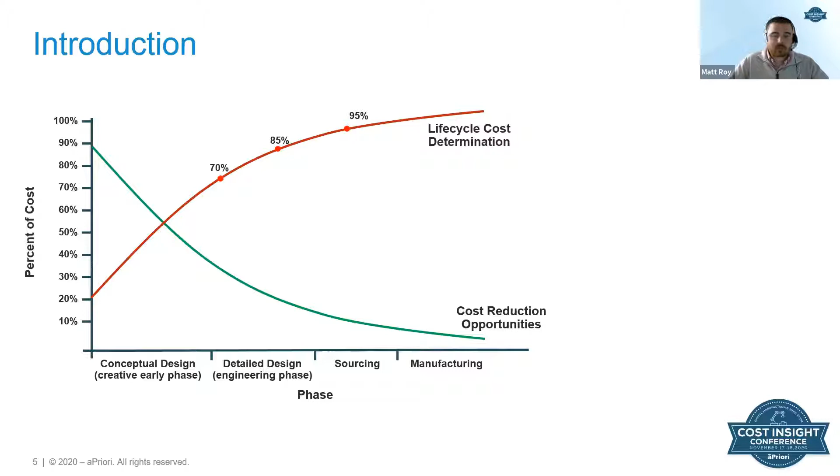So what I would ask you to do today is think critically about the concepts that we're going to be discussing and how they may be applied to your particular business processes. And hopefully by the end of the presentation, we'll be able to apply some of these techniques to identify previously unknown cost reduction opportunities. Ultimately, what we're looking to do is increase efficiency and quality while decreasing our overall cost.

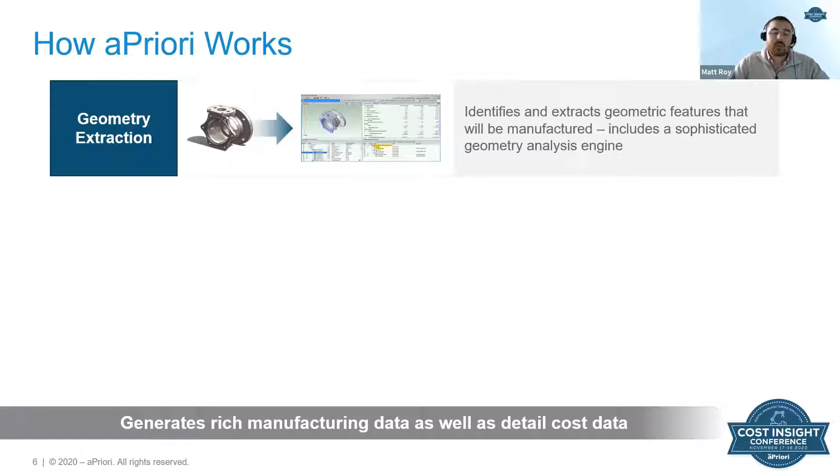How aPriori works. I want to spend a couple minutes talking through how aPriori works at a very high level. What we first do is we take our 3D geometry from a CAD file, we load it into aPriori, and from there, we're able to disambiguate individual geometric artifacts into GCDs, or geometric cost drivers. Once we have those geometric cost drivers, we run those pieces of geometry against manufacturing simulations in our cost models at the back end of our digital factories.

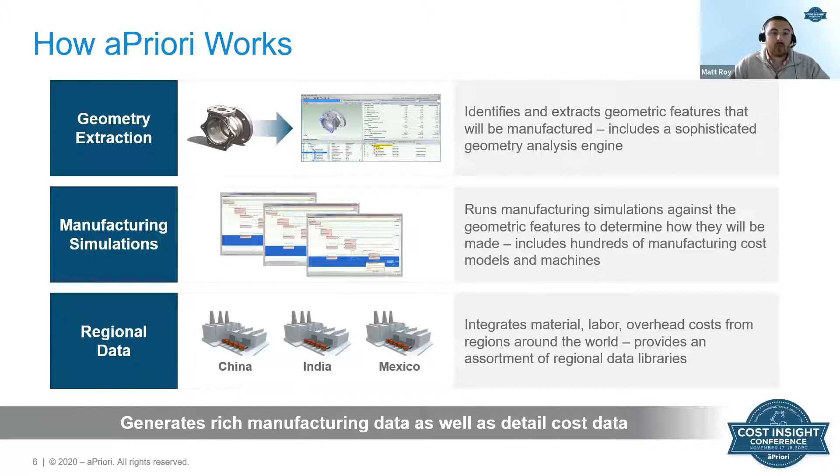And our output from that analysis is cycle time. So we get a cycle time for every single feature on the part. Then we roll that cycle time up to the process level, and from there, we impose accounting logic and data against that time to arrive at a cost. The accounting logic can be driven from the US, or from other geographical regions around the world to better represent your particular manufacturing environment.

The first topic that I want to discuss is establishing visibility into estimated cost and target cost. Everything that falls in this presentation is going to be pretty important to us, but this analysis of looking into estimated cost versus target cost is where we need to start, because it gives us an idea of which components we need to look at deeper to understand if there are potentials to reduce our cost based on what our target cost is.

So in design, and specifically VAVE, it really does help us have the visibility into what our estimated cost is compared against our target cost. This presents a pretty interesting challenge in that we're never looking at a single component. It's always multiple. We don't make a component. We make a component to put into an assembly to go into a larger overall assembly that might then make its way into a larger product like a car or an engine, something along those lines. And one component is just a single element of that.

So tracking these estimated costs and target costs can generally be pretty time consuming. But what we do have is a tool called Cost Insight Reporting that allows us to easily view the requisite data in condensed format. And for those unaware, Cost Insight Reporting is a business intelligence tool that enables our data aggregation and visualization. So through that tool, we can start to get an idea as to where our estimated cost is in relation to our target cost.

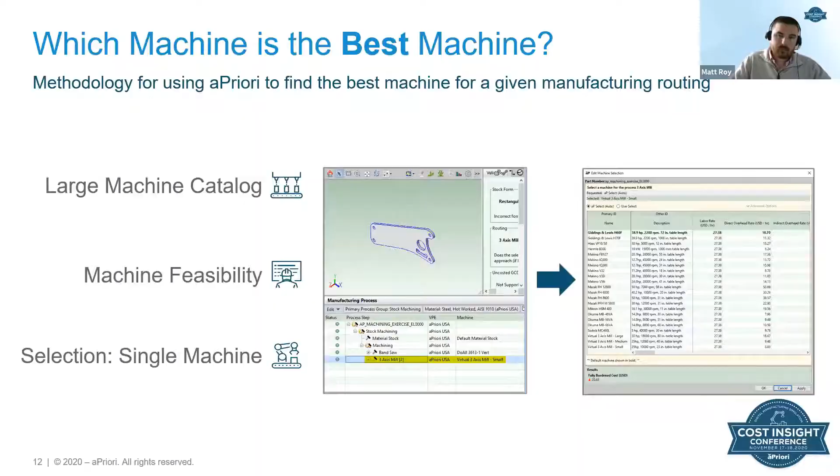And the last bit of analysis that I want to talk about before we get into our demonstration here is why bother with manufacturing alternatives? Right, you have a part, you know what the manufacturing routing is intended to be, but we want to explore a bit more. We want to understand exactly, is that the best manufacturing routing? You know, is 3-axis mill, for example, the best routing for our part?

Like I just previously mentioned, the manufacturing process chosen might not be the most cost effective. And much like the other analyses, it's time consuming to perform a costing for each different routing, compare, and do all the other legwork that's associated with it. So first of all, why bother with manufacturing alternatives? Well, dollars might be left on the table.

So this situation provides us with the opportunity to explore other potential possibilities. We don't necessarily know if we're getting the best deal or if we're using the best machine or the best routing. We can understand where that might be by evaluating other alternatives. We can also glean some manufacturability information from the process.

To keep with the 3-axis mill example, perhaps we say that a part is going to be manufactured in a 3-axis mill, but running it through aPriori deems that infeasible. Well, that just gave us a pretty good piece of feedback in that we shouldn't even bother considering 3-axis mill as a process from here moving forward.

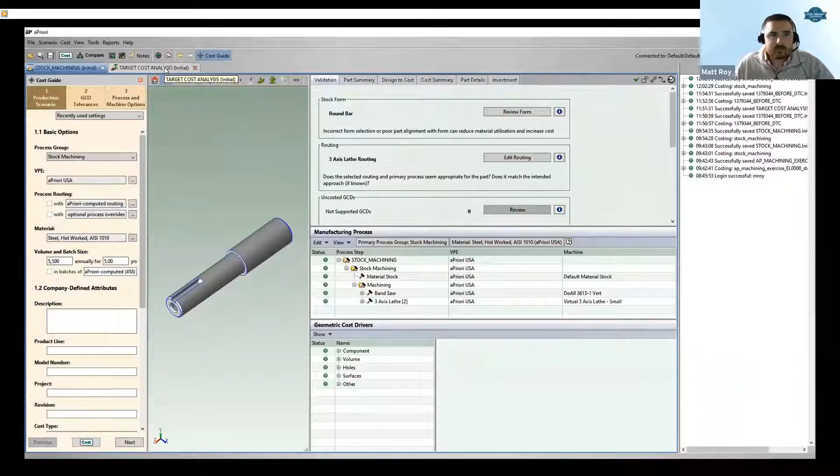You can see in the tab to the right of where my mouse currently is, and we'll get there in a moment. But if you hadn't yet created a target cost analysis rollup, you can very easily just go to File, create a new rollup, and supply whatever inputs it asks for, and then you'll have that accordingly. But if we flip over to the rollup here, I've already gone ahead and specified our target costs on all 5 of these components.

So once you have your target cost set, what you're really going to want to do is launch Cost Insight reporting. And again, for those who aren't aware, Cost Insight reporting is just a business intelligence tool that allows us reporting. So when you first get to Cost Insight reporting, you'll be asked to log in, and you'll be presented with this splash screen. Now, before we can start taking a look at our data, we need to export our data from aPriori. So we're going to want to go to the Manage tab, and then within there, we're going to want to go to Scenario Export.

And we're going to be creating an export set, which is basically just a definition of what data and how often we want to export from aPriori to this reporting tool. So we'll take a look at the one that I've already created. So we'll go ahead and click Edit, and you'll get a dialog window. So you'll have an opportunity to identify a set name, provide a description. It's optional but encouraged. Select our scenario schema, which is just what's in aPriori, where we're pulling the data from.

Our export scope, we're going to set that as scenario. We're interested in exporting a rollup, so we're going to select as such. We're going to supply our name and scenario name of the rollup, and this has to be verbatim. It is case sensitive, so it needs to be exactly how it appears in aPriori. Then we can also set our frequency to once or repeat.

And for purpose of this demonstration, I'm only going to be exporting it once, but just know that you could repeat it however often you want, whatever schedule you can create in here. So we'll go ahead and update that. And from here, what we'll do is we'll go ahead and export that data now. And that is what you need to do in order to get the data from aPriori to Cost Insight.

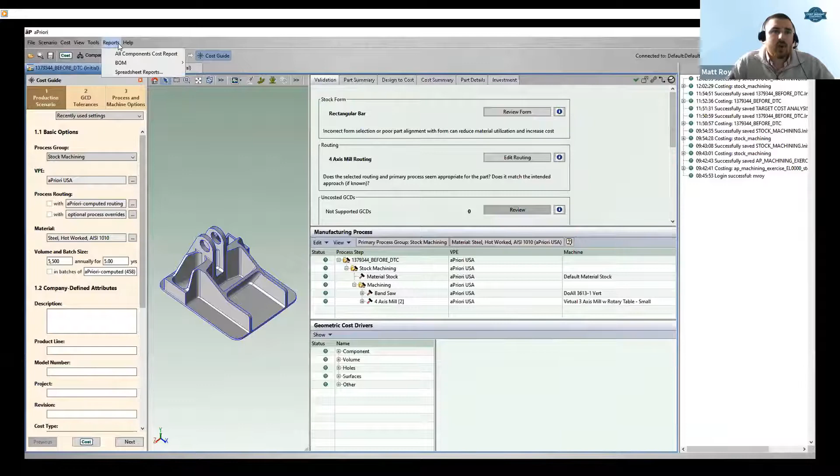I would recommend instead in this workflow that we run a handful or at least one report in particular on a part like this that's complex to see if there's any other information that we might be able to glean that would allow us some more actionable results. So we're going to run the cost driver report. So we're going to go to Reports at the top and then spreadsheet reports. Save that report to a location of your choosing, and then generate the report accordingly.

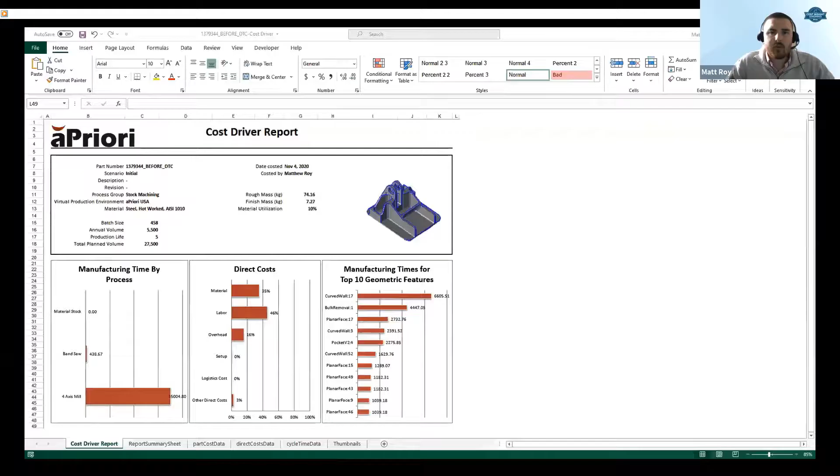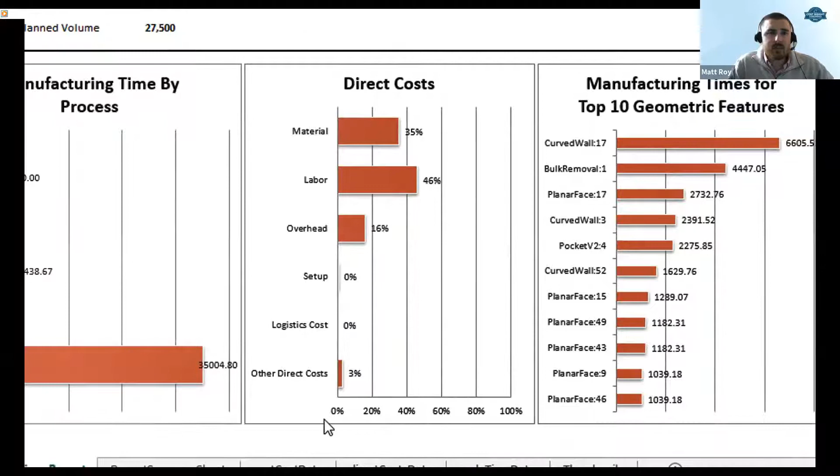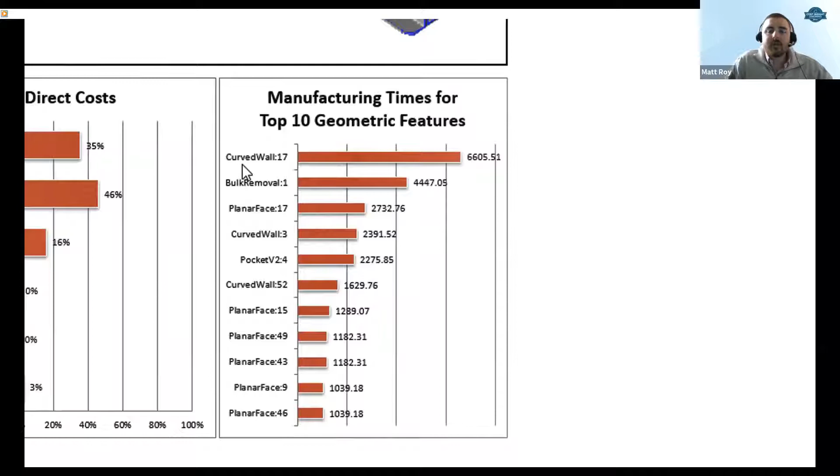So within this report, you can see that we have 3 different categories. We have manufacturing time by process, which breaks things down into their cycle time constituents for the particular part. We have direct costs, which gives us a percentage breakdown of where our cost buckets are. And then we have our manufacturing times for our top 10 geometric features. You can see here we're breaking this down in terms of cycle time from 1 to 10 in terms of most expensive. And CurvedWall 17 is the geometric feature that is most expensive.

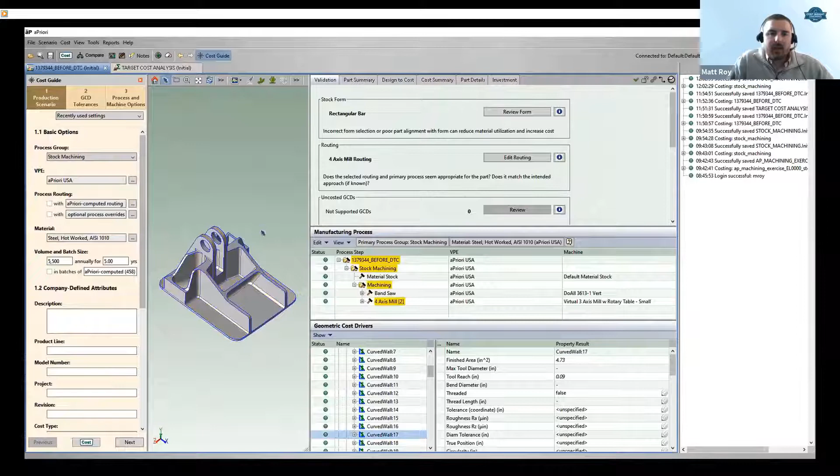So now, if we jump back to the UI, what we're going to want to do is interrogate that particular feature, CurvedWall 17. So what we can do in our geometric cost driver panels, we can go to CurvedWalls, we can find CurvedWall 17, we can open it up and we can have a look at where it is in the part. So you can see that's a floor of a pocket right there. And if we open it up, we can see that it's being assigned to contouring.

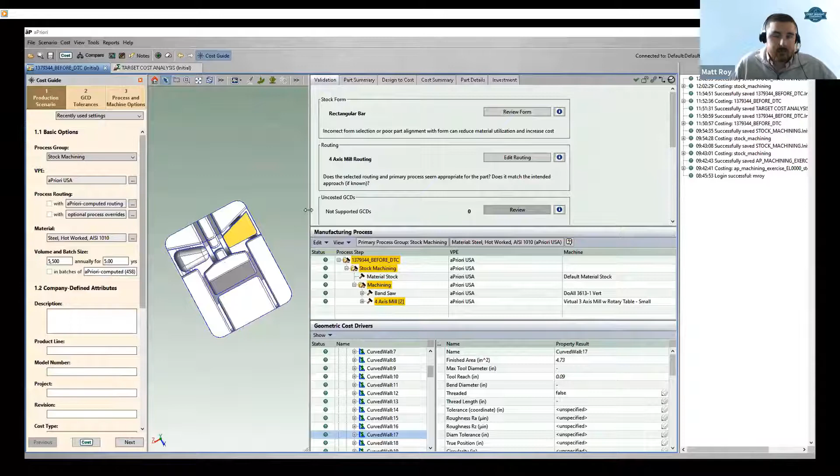And what this means is that perhaps we could redesign that feature to not be curved. We could maintain some level of flatness, so we might be able to go in there with facing, for example, instead of contouring, so that we can definitely drive down cycle time. Another thing I want to pay your attention to that we can use within the user interface to help get us some additional results is our heat map.

You can see that I've filtered on cycle time just to see where the highest offenders are in terms of cycle time. But from there, we can use our slider here to refine what our color gamut is to better indicate where particular cycle time issues might be.

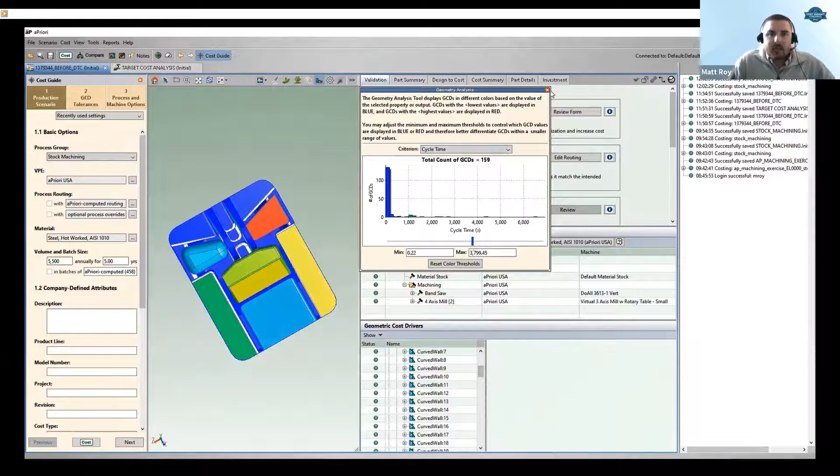Now, one other tool that I want to bring your attention to is our DTC tab, or Design to Cost. What this gives us is it highlights potential areas of concern; in other words, it provides us with visibility into manufacturability issues that we could subsequently rectify, which would most likely yield a cost reduction effort. You can see we have side milling L/D issues, sharp corner issues, and obstructed surface issues.

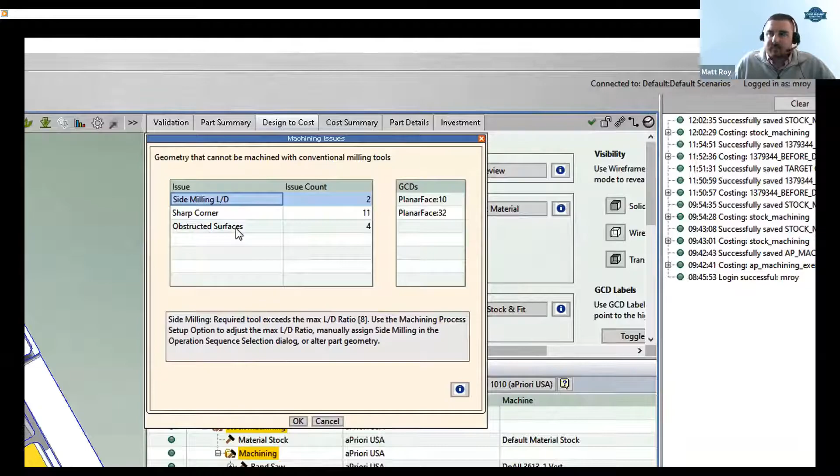Now, moving on to the machine analysis portion of things. As I mentioned in the presentation, the machine that aPriori selects by default isn't always the most appropriate machine. So we want to perform an analysis on machine cost, and that begins with selecting a particular part. We're going to analyze a rather simple part instead of the more complicated part, just for demonstration here. So we'll double click on our part in the roll-up and open that up in the user interface.

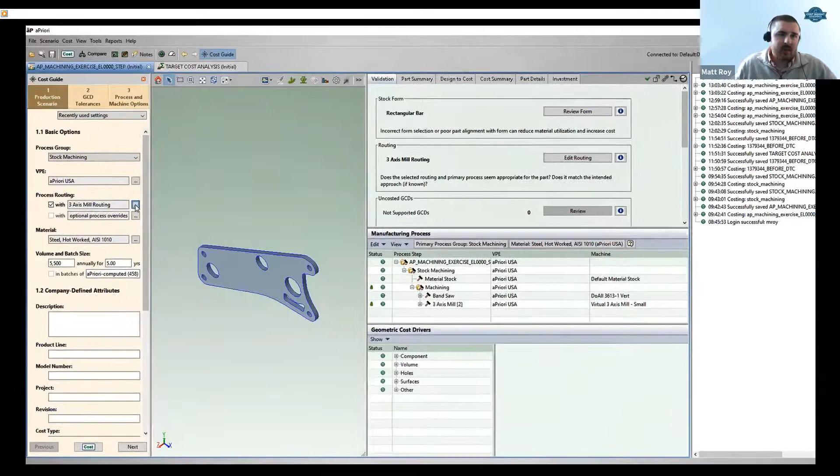Then we're going to identify what routing has been pinned, and after that we'll take a look at what machine has been pinned. You'll notice that I pinned my routing to 3-axis mill. You can see that by the checkbox to the left there, and you can also see it by opening up the ellipsis icon, making sure it's in light blue, and the checkbox is there as well.

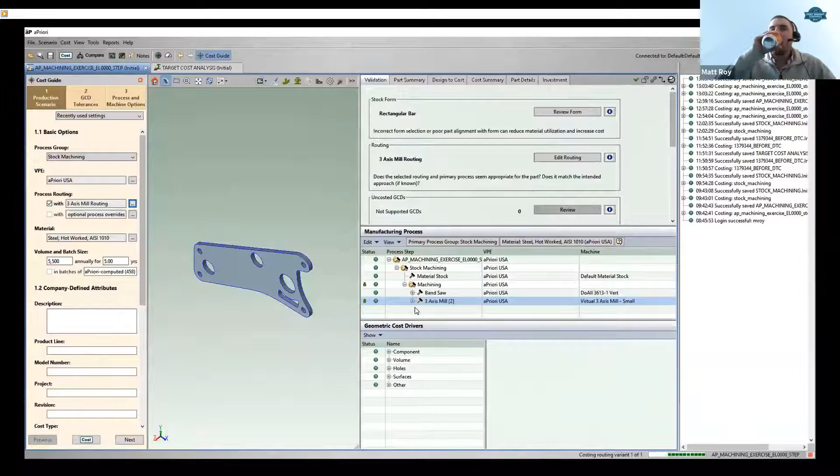But now we want to pin the machine as well. So you go in the manufacturing process, right click on it, go to machine selection, and make sure in this dialog window that the machine has been selected by the user select radio button at the top. Then we want to recost the part and subsequently save that part after the costing has been completed.

After that, we want to see which machines are actually in our digital factory. So we'll go to Tools, VPE Toolset, then our VPE Manager, and we'll take a look at aPriori USA, as that's the VPE that we're using. We'll open that up, expand machining, expand machines, and then select 3-axis mill. This gives us a tabular view of what machines are actually available to us in the current digital factory for analysis.

We'll flip back to the user interface and launch our deep costing UI by going to cost and cost scenario. You'll be familiar with this screen if you know bulk costing. What we want to get out of here is just a user input sheet, which we can do by going to File, Export User Input Spreadsheet. That'll generate an Excel sheet. We'll save it, and then we'll open it. We're using this to set our machines accordingly for whatever scenarios we want.

If we scroll all the way over to the right in our spreadsheet, you'll see that we have 2 columns, one for pin routing and one for a machine. We're pinning 3-axis mill as our routing, and we're pinning our machine to virtual 3-axis mill, the small one. Now we'll jump back to our table of all our machines for 3-axis mill, copy that table, paste it onto a new tab, do a bit of data manipulation, and through the power of video editing, we have a cleaner sheet here.

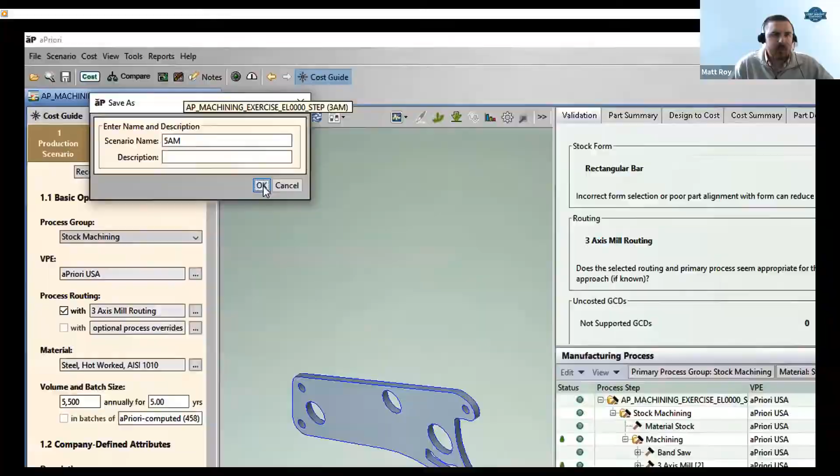So what we're going to want to do is go ahead and create a new scenario for 5-axis mill by going to Scenario, Save As, calling it what you want. I'm going to call it 5AM, and adding a description if applicable. Now, as part of this, a new scenario is going to be generated, but it's going to have the same parameters as previous. So we're going to want to go ahead and remove any overrides that we made during costing. 3-axis mill overrides aren't applicable anymore for 5-axis mill.

We're going to want to go ahead and pin our 5-axis mill routing. Again, you can see the checkbox to the left of that. And then we're just going to go ahead and click cost. So we'll go ahead and let that cost. Once the costing is complete, obviously you're going to want to go ahead and just save the scenario.

And now what we're going to do here is create a new scenario for sheet metal. Same process as before. We're going to go to Scenario, Save As. We'll call this one sheet metal. Again, description if applicable, but encouraged. And we'll go ahead and create that scenario.

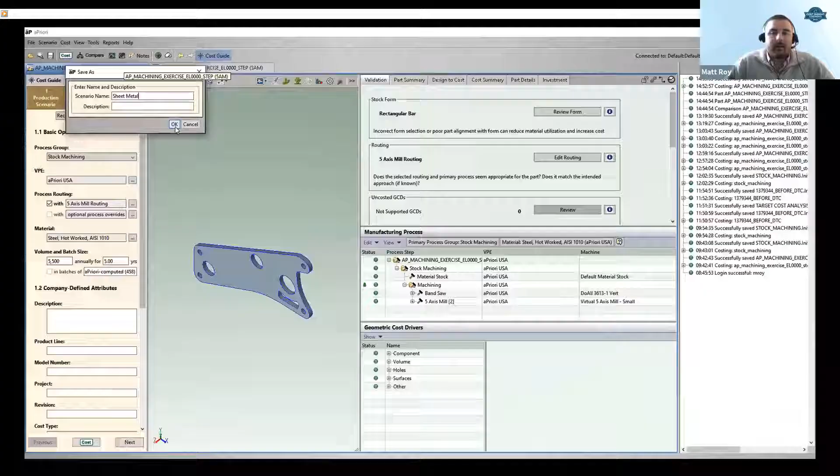So once that scenario is created, we're going to go ahead and remove all our overrides again. But before we do that, we'll go ahead and change our process group to sheet metal. And notice when I remove the overrides here, our process group goes back to stock machining. Just pay special attention when you're doing that to make sure that your other overrides haven't been accidentally overridden.

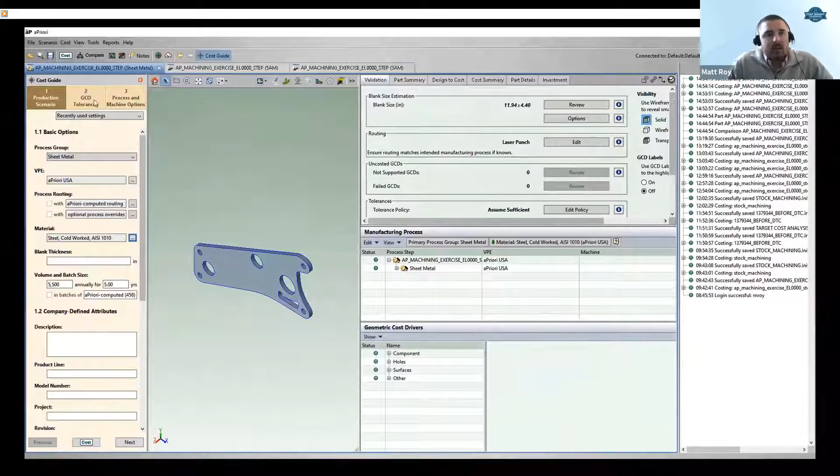So now that our costing is complete there, we're going to go back to our original scenario for 3-axis mill, which is going to be our base scenario. And we're going to launch our comparison from here by clicking the comparison button that's to the right of the cost icon. And that's going to present us with the dialog window to enter the name of the comparison, a scenario name, and a description. In this case, I definitely think something meaningful in the description is very helpful.

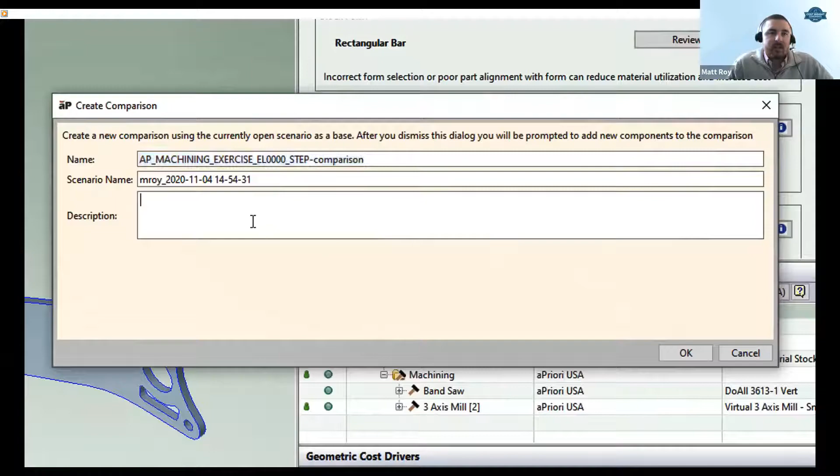And then from there, it's going to ask you to select the particular scenarios that you want to include in the comparison. And you do have the option to multi-select by control left click. Make your selection, click OK, and then what you're going to be presented with is a comparison. And from here, you can add, remove, open, change your base scenario, whatever you might want. But what we're interested in at this point is running a cost comparison report to see what the difference in breakdown is, and so that we have an offline version of this analysis.

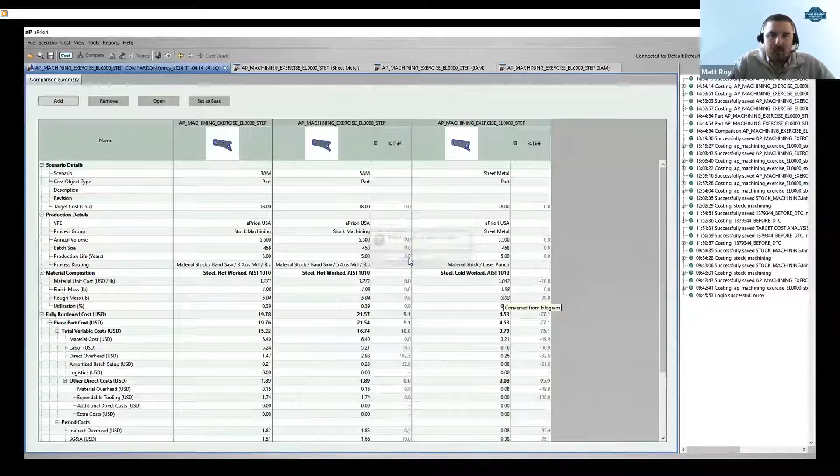So what we're going to do from there is go to Reports, Spreadsheet Reports. We're going to select our cost comparison report, and we're going to save it to a particular location that we're interested in. We'll let our report generate. And from here, we can start to see what the difference in costs are, some other high-level information, and start to get an idea as to which manufacturing routing we want to pursue further. And ultimately, like I said, taking this offline gives us an opportunity to view this analysis without having aPriori open. So that concludes our demo.

What I'm going to do now is I'm just going to jump back to our presentation. So just give me a moment to do that. I'm going to go ahead and stop sharing my screen once again. Let me go ahead and share my presentation.

Okay. So in conclusion, and wrapping up our presentation here, a couple points that I just want to reiterate. We're in the midst of a global pandemic right now, and that being said, a lot of companies are being forced to postpone any NPI. Really, the onus has been put on our value engineering and value analysis groups to understand where we can drive cost out of our components and products that are already existing. And like I said before, it's really difficult to understand where the cost can be driven out of these products, as well as just the general ability to prioritize based on their respective cost impact.